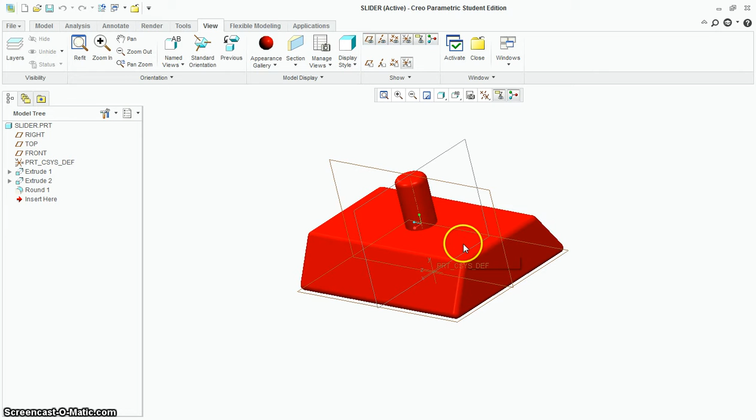Okay, this tutorial is starting the assembly on the double slider ride. So we're going to take the slider and put it into the base that you've created. We're going to do that so we can get a measurement from pin to pin to see how big we need to make the platform.

So we're going to get out of our slider here and start a new assembly. Make sure you click assembly, not part, and this is going to be the slider ride. This will be kind of a work in progress as you create different parts. I'd recommend finishing a part completely, then adding it to the assembly, then finishing another part completely, then adding it, as much as possible. Don't leave things incomplete and add them, then have to go back and change them.

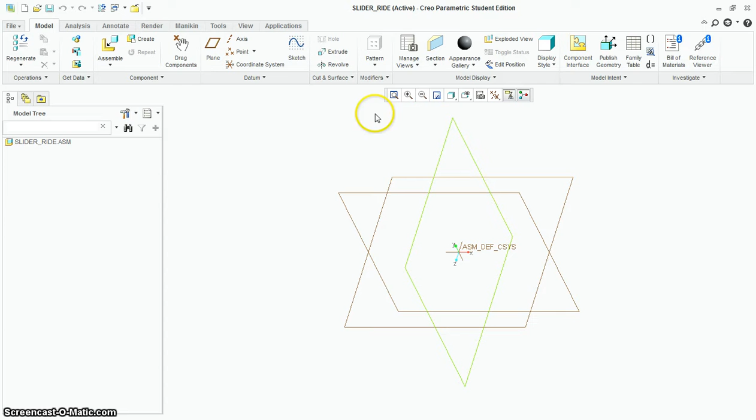So we're going to start with our base. We'll go ahead and assemble this base, hit OK. This will be important, that this is the default part, the main part that locks it to the Cartesian coordinates, the XYZ axis. Go ahead and accept this.

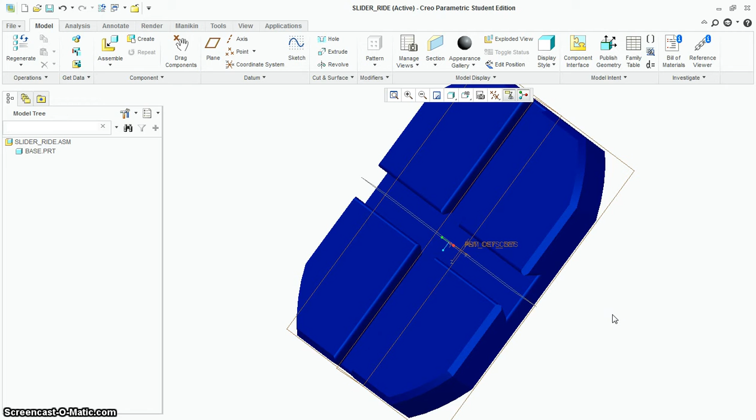And there's our base. Notice how I have the planes running through the center of these dovetail cutouts. We're going to use those for this assembly. If you don't have that, you need to either go back and add a datum plane from the side and move it in the correct number. So if the total distance was 100, you would make a datum plane parallel to this edge and move it in 50. Or you need to go back to your two-dimensional drawing and center these planes, because we're going to need this to put it together properly.

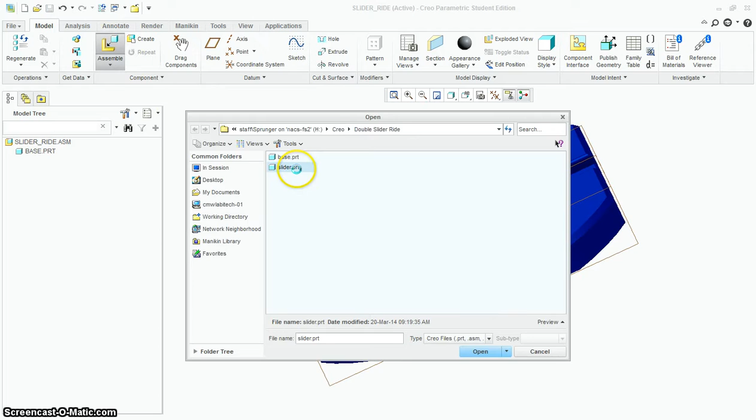So now we're going to assemble a slider, and you can see that it roughly comes in where it's supposed to go. If you want, you can drag it over here, and then we'll say the center plane. Here again we need a plane down the middle. This plane needs to align with this plane, and you can see that it's aligned, so it's in the right spot.

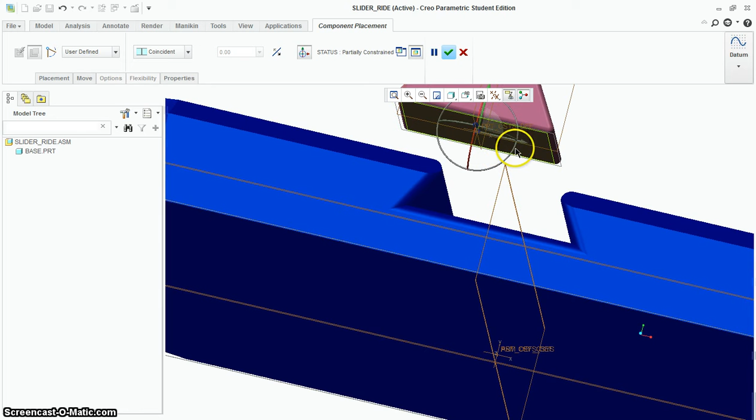And then we're going to say, okay, the underside of this slider, that surface is going to touch that surface. Once you accept this, it is out here, but you can go up to this drag components tool, click on the actual slider top, and it should slide right in here. You can see it has movement, so you can test this out and see if it works correctly.

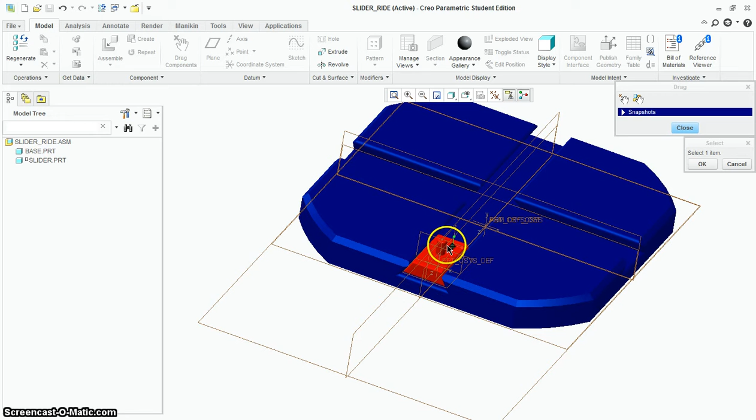So I'm going to slide it almost out to the edge, but not outside the actual dovetail cutout, and that's where I want to have its maximum movement. I'm going to click OK here, close, and add the second slider.

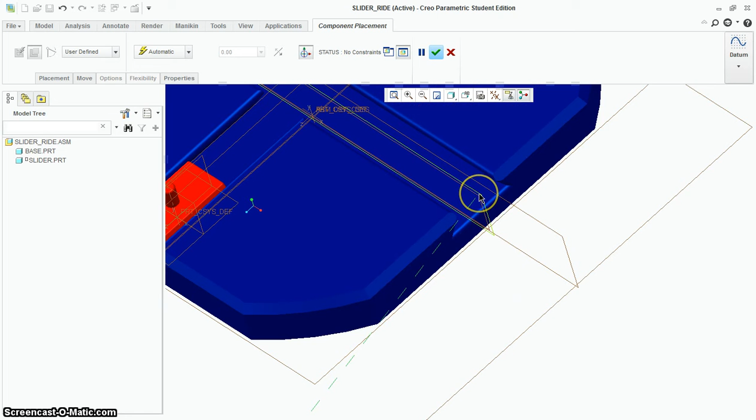So here's another slider. You're basically going to do the same thing, but on the other cutouts. We're going to say this plane is going to align with this plane. And you can see, what happened?

Nothing. So let's change this to coincident, and now when you look at it, it moved over here and it's aligning. Then the second constraint is that the underside of this slider would go ahead and touch the bottom of this cutout, and then you should be good.

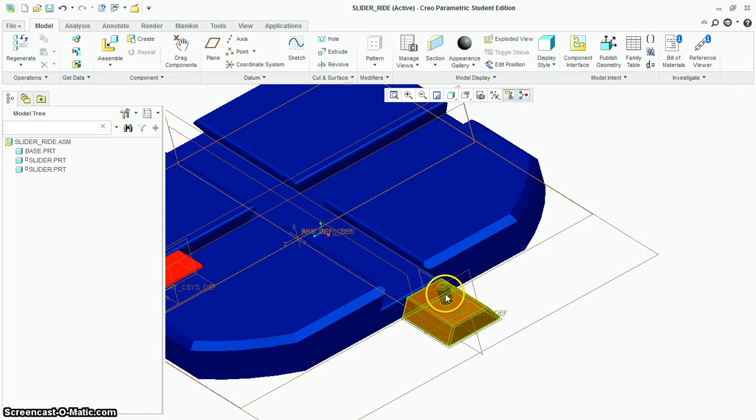So we're going to try this one as well and make sure it's sliding properly. If this is not sliding, something's wrong, and you would need to reassemble this and make sure these are moving before we go ahead and put the platform on top. Because if these don't move, your platform's not going to move. So you need to build this from the ground up so everything's working.

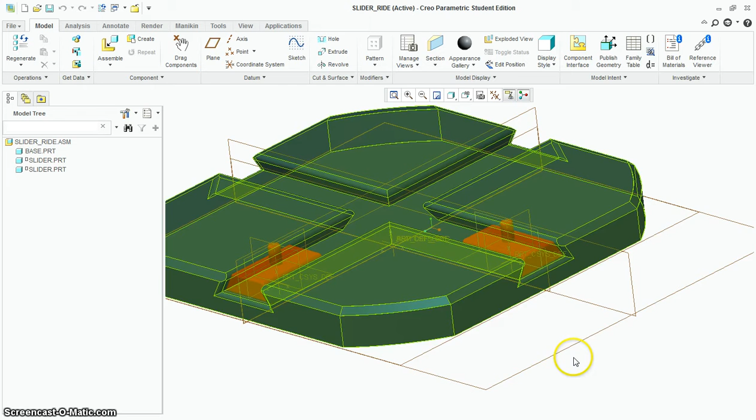And what I want to know is the distance between these pegs, because that's going to be the distance, or the maximum distance, between the holes in my platform. So we're going to use this analysis tab at the top, go to measure, and measure the distance from here, and this could be a rough measurement if you want.

Now I'd like to get that axis running through the middle. It's kind of tricky to click on here. Maybe if I zoom in, there you go. From there, and then zoom in over here.

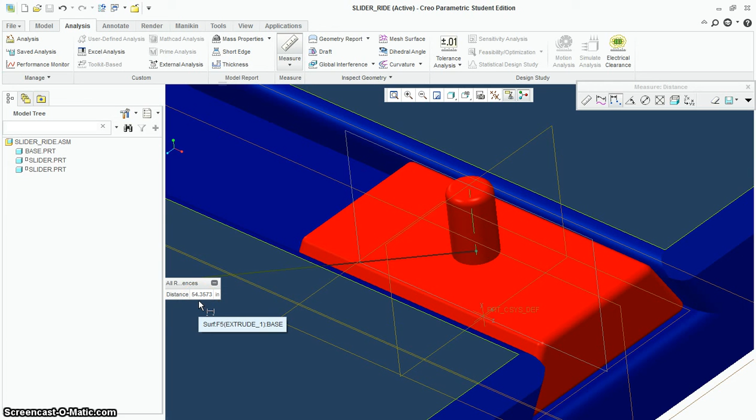Now you do have to hold the control key down to measure between these. So control and then click, and you can see it's telling me a distance of 54. Alright, so it's actually 54 and a little bit, but I'm going to go ahead and write down on my paper that I want the holes 54 inches apart.

And so the next tutorial will be building the platform with holes 54 inches apart.